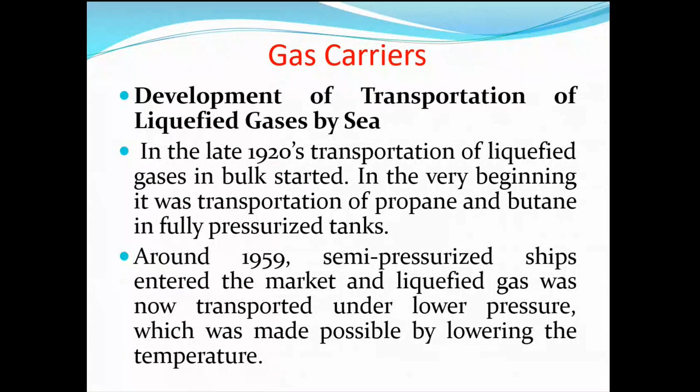If I have to transport gas in a gaseous form, we need much more space compared to when we transport it as a liquid. I think it's about 600 to 650 times less space required when we transport these gases in liquefied form.

By 1963, fully refrigerated ships for LPG, LNG, and certain chemical gases were in service, carrying cargo at atmospheric pressure.

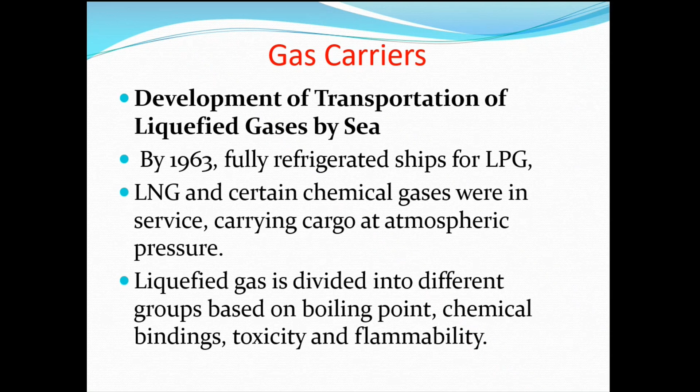Liquefied gas is divided into different groups based on their boiling point, chemical bindings, toxicity, and flammability. These different groups of gases have led to different types of gas carriers, and to different cargo containment systems for gas carriers.

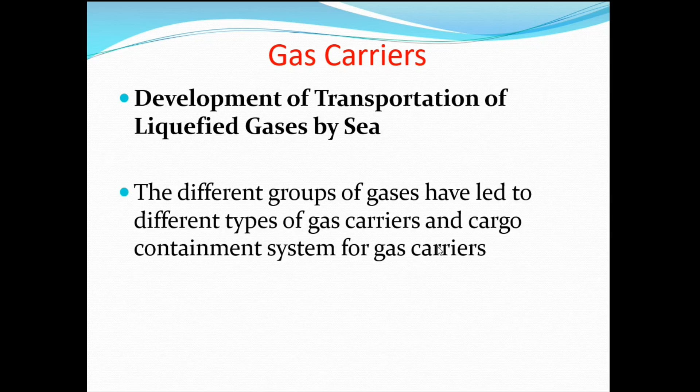This bulk transportation of gases is controlled and regulated by our gas carrier code, the IGC. A lot of research has gone into what type of materials to use for the tanks, especially when carrying at high pressure.

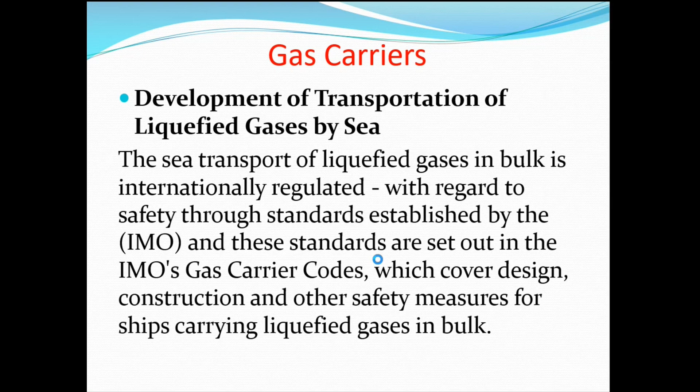Then, of course, the wall thickness of the tanks has to be thick. If you are carrying at very low temperatures, the material should be such that it can withstand so much temperature, like in the case of LNG, which is transported at minus 160, minus 161 degrees. So definitely these materials must be specialized. This is how the research progressed, and finally today, gas transportation looks not so difficult after all the technology that has been put into it.

For economical marine transport, gas is carried in a liquefied state. As a liquid, the volume to weight ratio at atmospheric pressure is in the range of 650 times less than in the gaseous state. That means we can carry 650 times more cargo in liquid state compared to carriage in gaseous state.

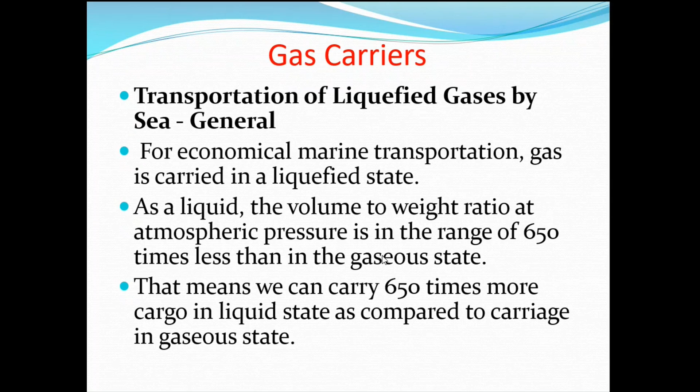The temperature and pressure determine whether gases can be condensed. The temperature at which a gas condenses is a function of its pressure, and the combination of pressure and cooling is therefore fundamental to gas carrier design.

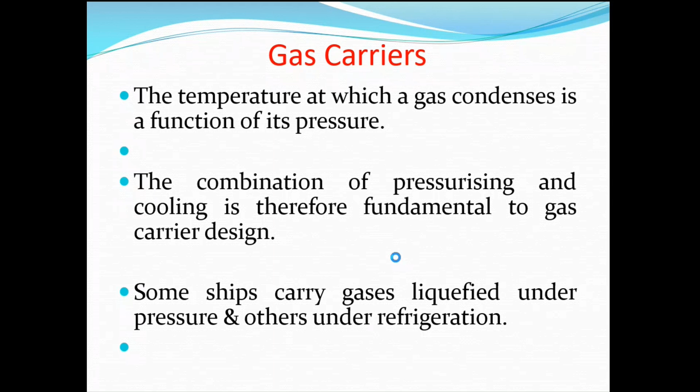Some ships carry gases liquefied under high pressure, while others carry these gases under refrigeration at low temperatures. Certain gases cannot be liquefied even under high pressure, but when you lower the temperature, they can be liquefied. The most significant cargoes in terms of tonnage are methane, what we call LNG, which is mostly methane, LPG, butane, propane, mixtures of these, and ammonia.

Other cargoes of commercial significance include butadiene, ethylene, propylene, and vinyl chloride, which is used for manufacturing PVC. Apart from ethylene and methane, all these gases can exist as liquids at normal ambient temperature, which is the best part, since temperature doesn't affect them, but under high pressure it does.

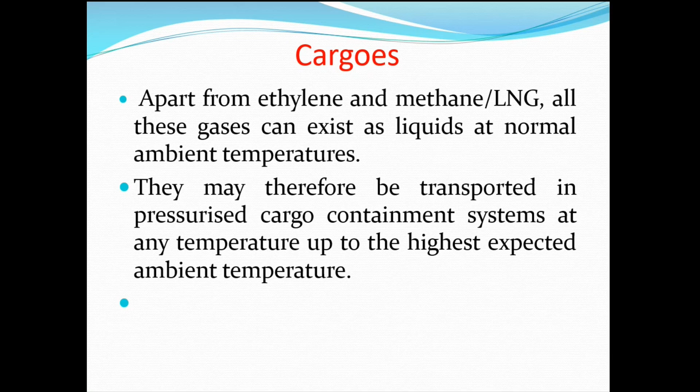Therefore they are transported in highly pressurized cargo containment systems at any temperature up to the highest expected ambient temperature.

The critical temperatures for ethylene and methane, LNG, are below normal. LNG, as I told you, is transported at about minus 160, minus 161 degrees. It is difficult to even imagine carrying a liquid at such a low temperature. You definitely need the ship's design, systems, equipment, gauges, sensors, and pumps that can withstand this low temperature, along with the dangers associated with it.

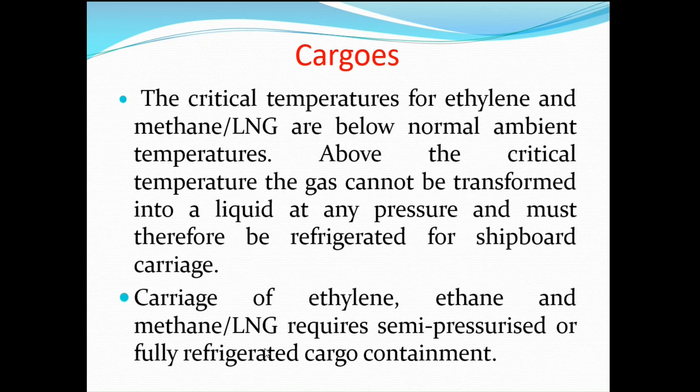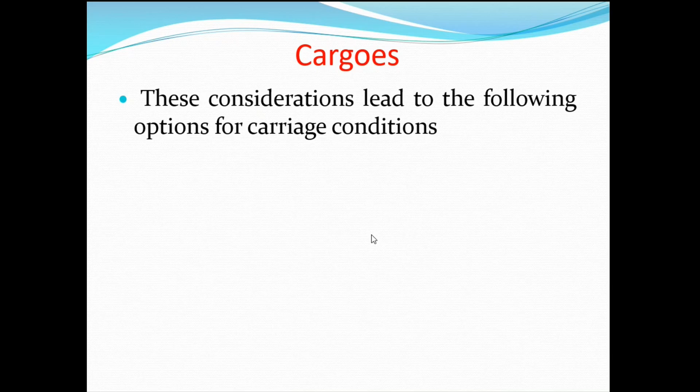The carriage of ethylene, ethane, and methane requires semi-pressurized or fully refrigerated cargo containment systems. These considerations led to the following options: certain gases can be carried in highly pressurized vessels, certain gases in refrigerated vessels, and certain gases in semi-pressurized or fully refrigerated systems.

That's why you see different types of ships, because all these gases cannot be carried in the same ships. Some need fully pressurized, some semi-pressurized, and some need fully refrigerated systems. So this is what we will see next, the various types of gas carriers, based only on these properties of the gases to be carried.

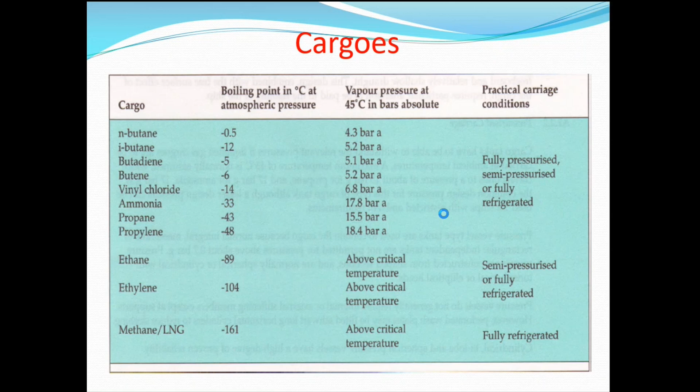Now comes the materials. Materials exposed to liquefied gas cargo should be resistant to any corrosive action of the gases. For this reason, copper alloys and brass have to be excluded from the cargo systems of ships.

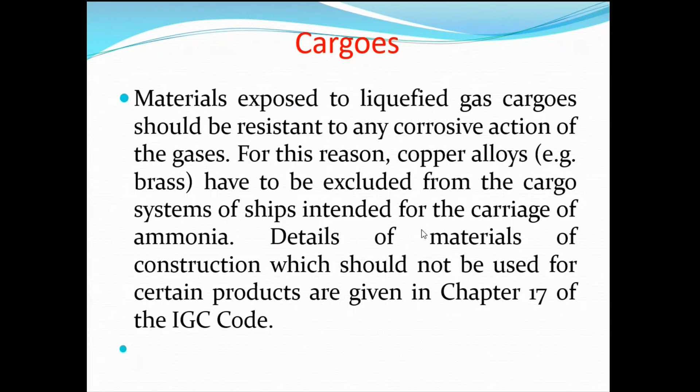And details of these materials of construction which should not be used, again chapter 17 of the IGC code. Now this code is again very nicely written, covering the properties of these materials, how they react and what they can do. So during construction they take care of all this following the IGC code.

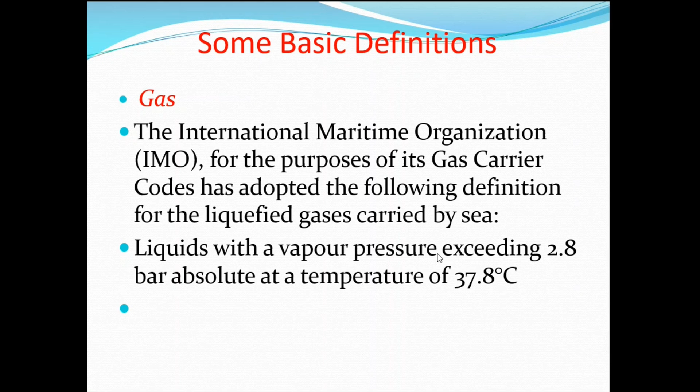Now some basic definitions, of course, for guys who are not working on gas carriers. A gas, as per IMO for the purpose of its gas carrier codes, is a liquid with a vapor pressure exceeding 2.8 bar absolute at a temperature of 37.8 degrees or 100 degrees Fahrenheit. Any liquid which has a vapor pressure exceeding 2.8, they call it a gas.

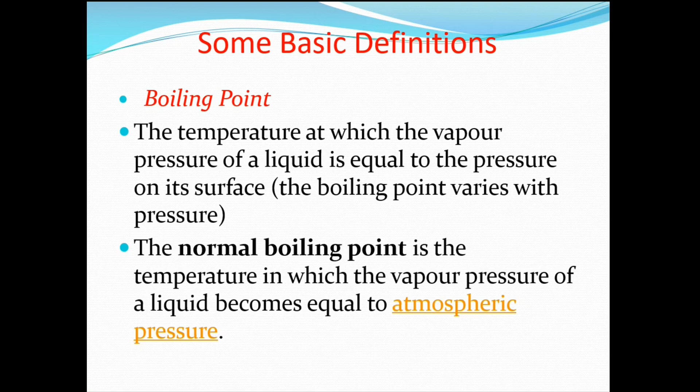Boiling point is the temperature at which the vapor pressure of a liquid is equal to the pressure on its surface. Simple. Or it is the temperature at which the vapor pressure of a liquid becomes equal to atmospheric pressure.

Cargo area, of course, we are all familiar with. Cargo area on any ship, especially tankers, you have seen. Now this cargo area is a dangerous part. Gases, flammability, anything is present there. So it is the part of the ship which contains the cargo containment system, cargo pumps, compressor rooms, and includes the deck area above the cargo containment system. Cargo containment system is basically your tanks.

Cofferdams, ballast tanks, void spaces at the after end of the aftermost hold space or forward end of the forwardmost hold space are excluded from this cargo area. So the cargo area is where all these things are, basically your cargo tanks, pumps, pipes, compressor rooms, and this area definitely will be a hazardous area.

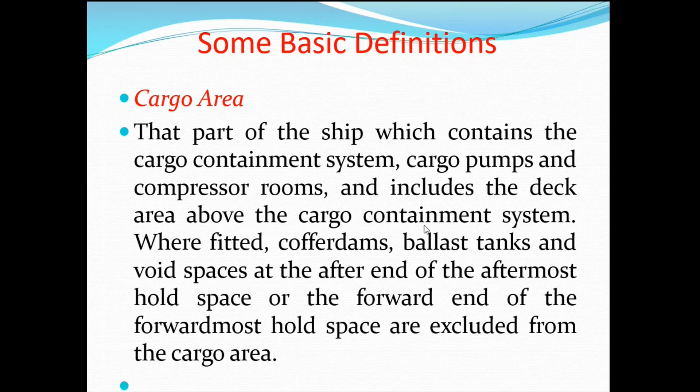Cargo containment system: the arrangement for containment of cargo including, where fitted, primary and secondary barriers, associated insulation, and inter-barrier spaces. So this is what we call the cargo containment. It's like a thermos flask, no? You have a primary barrier, you have a secondary barrier, so the temperature should not affect it, and in between you have insulation.

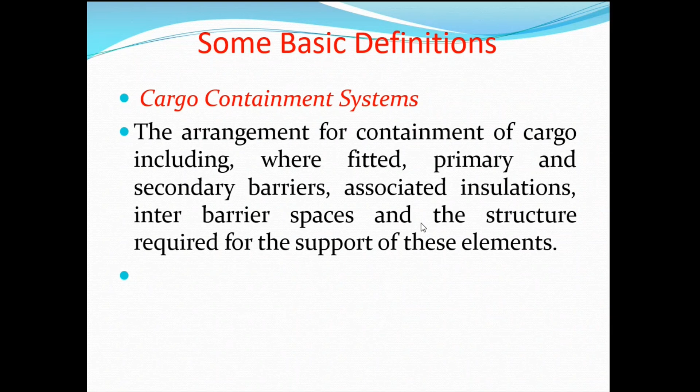Gas dangerous space or zone is a space or zone within a ship's cargo area which is designated as likely to contain flammable vapor and which is not equipped with approved arrangements to ensure the atmosphere is maintained in safe conditions. Any ship we have, whether it's tankers, product, chemical, all these areas where gas vapors are present, we declare them as a gas dangerous zone.

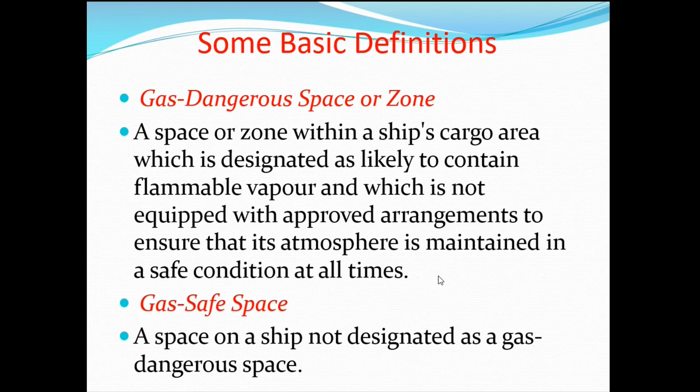And a gas safe space is one which is designated as not a gas dangerous space, like inside your accommodation. Of course we have certain spaces, otherwise smoking and all that is not permitted. So only the non-gas spaces where no gas exists are considered safe.

Hold space, these are the terms very frequently used in gas carrier designs or the gas carrier code. The hold space is the space enclosed by the ship structure in which your cargo tanks are basically kept. It's like a cargo hold, and you keep a structure or a tank inside the cargo hold. So the space between your tank and the ship structure becomes your hold space.

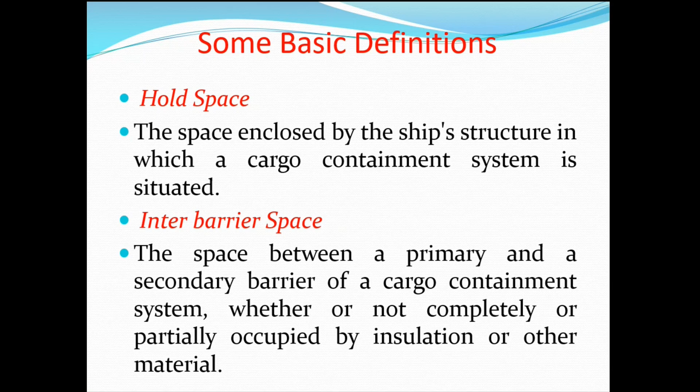Interbarrier space is the space between the primary and secondary barrier. It's very simple if you see it from the sketch also. MARVS, another term, is the abbreviation for maximum allowable relief valve settings. Normally all tanks have individual relief valves in case the pressure exceeds. These valve settings are even mentioned in your COF, that all these valves for these cargoes are set at a particular pressure.

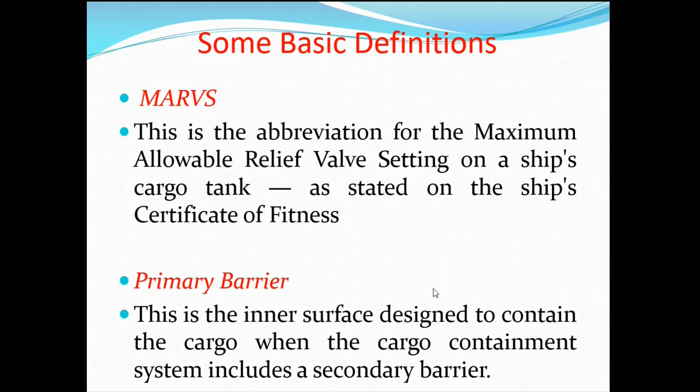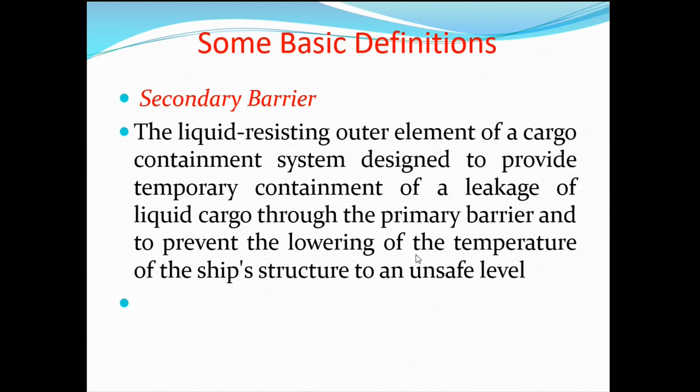Primary barrier is the inner element designed to contain the cargo. And the secondary barrier is basically the liquid resistant outer element of a cargo containment system designed to provide temporary containment of a leakage of liquid cargo through the primary barrier. So the idea is basically to contain the cargo. In case there is a leakage in the primary barrier, it should not go out to sea. So the secondary barrier, which is basically a hull design, hull structure, will stop this cargo.

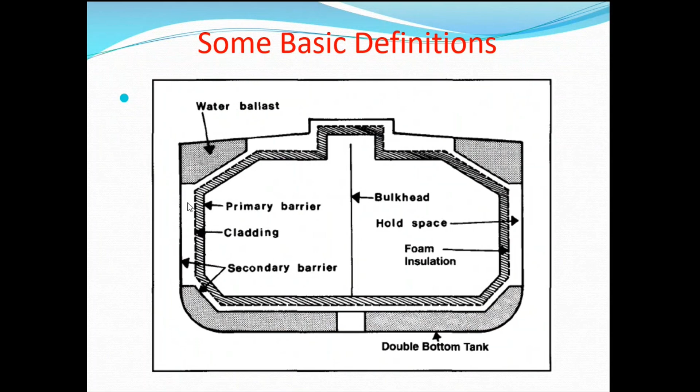So a normal tank, like I told you, first is the inner space where you load the cargo. This becomes the primary barrier, the inner coating. Then you have the insulation, steel cladding, and then the secondary barrier is again the hull. So in case the cargo leaks from here, it will not go out, it will remain in what we call the secondary barrier or the hold space.

Tank dome, a very common tank dome we see. On these gas carriers, it is not permitted for the cargo pump room to be placed below the upper deck, nor may cargo pipelines be run beneath the deck level. So therefore deep well or submersible pumps must be used for cargo discharge. Pipelines to cargo tanks must be taken through a cargo tank dome which penetrates the deck.

So these tank domes are basically used for all your pipelines, everything which is running. So there is nothing under deck like what we have on a liquid carrier or a cargo oil carrier, where the pipeline and pump room are all down below. Here everything runs through this tank dome.

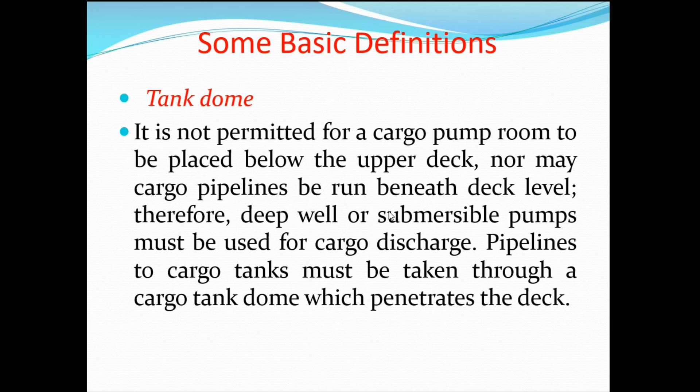Now comes the hazards. So what are the basic hazards which are associated?

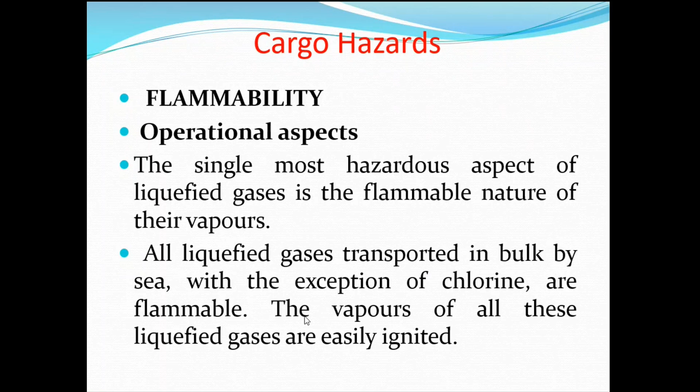Now flammability: the single most hazardous aspect of liquefied gas is the flammable nature. All liquefied gases transported in bulk by sea, with the exception of chlorine, are flammable. Vapors of all these liquefied gases are very easily ignited, because the moment the pressure is reduced or the temperature goes up, the liquid gets converted into vapor, and vapor mixing with oxygen, simple, catches fire. The exception is ammonia, which needs a higher ignition energy, and accordingly fires following ammonia leakage are less likely than with other cargoes.

Now, emergency aspects. Even on the ship, even on the terminals, we all know these gases are highly flammable, so the areas are declared ignition free zones. Why? Because of the very rapid vaporization of spilled liquid gas. Now it is in a liquid form. The moment it comes outside, the pressure is reduced. If it is carried at low temperature, the temperature goes up and it gets converted into vapors. And the spread of this flammable vapor will be far more extensive than in a similar spillage of oil.

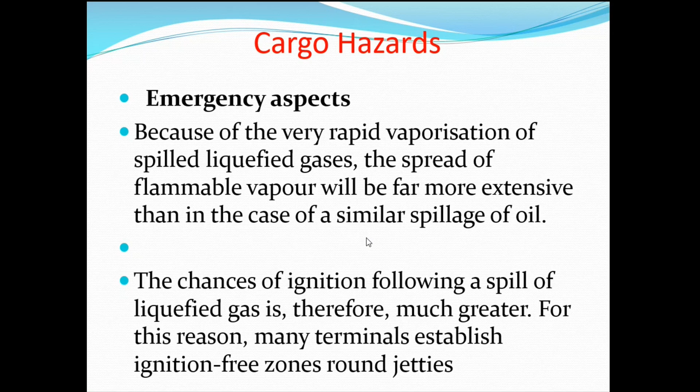So chances of ignition following a spill of liquefied gas are much greater. For this reason, at terminals, ships, everywhere, we take extra precaution: no ignition, no sparks, no flames, no smoking at all. And radiation from these liquefied gas fires, because of the rapidity of vapor production, can be intense. We cannot do firefighting like a normal case in normal clothing. You have to wear protective clothing because fire extends very fast, and the radiation from this fire can be intense.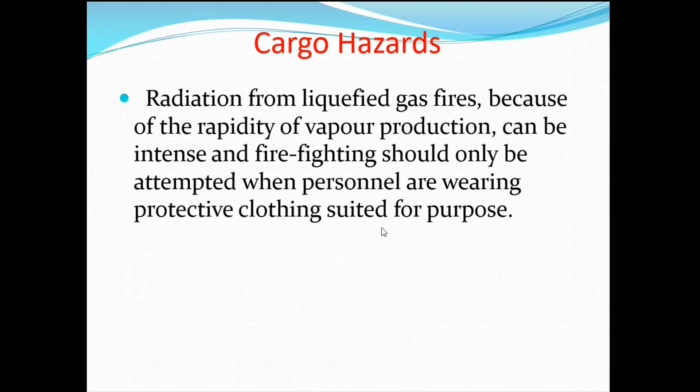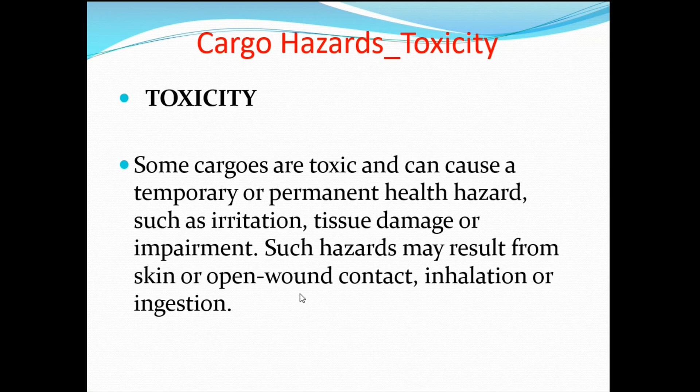Toxicity. Of course, some cargoes are toxic and cause temporary or permanent health hazards, such as irritation, tissue damage, impairment. We have seen toxicity in chemical tankers also; toxicity is everywhere today, even in crude. Some crudes have toxic effects and can enter through your skin, or open wound contact, inhalation, ingestion. We have gone through how toxicity affects us, so here also the same danger exists.

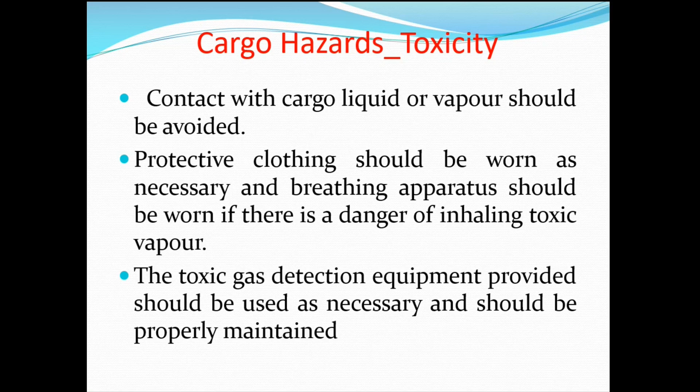Contact with cargo liquid and vapor should be avoided. Protective clothing, and if required, breathing apparatus and toxic gas detection equipment should be used as necessary and properly maintained. Now next is asphyxia, which is basically suffocation.

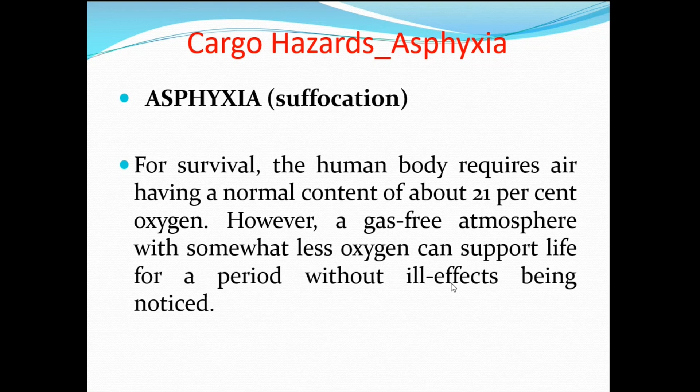Now when these gases or vapors are present in excess, there will definitely be a reduction in oxygen. And we know that the human body requires 21% oxygen for survival. However, in a gas-free atmosphere, somewhat less oxygen can support life for a period without ill effects being noticed. But the susceptibility of persons to reduced oxygen levels varies from person to person, and at levels below 19%, you find the person behaving absolutely differently.

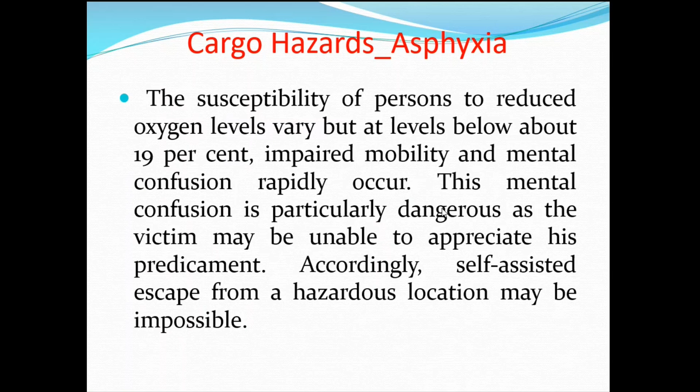There's mental confusion when the oxygen level is, say, about 19%. He may not be able to appreciate the predicament, or what is happening around him. So we may think that he is okay, but in reality he is suffering from the lack of oxygen. And below 16%, chances of survival are less. Unconsciousness takes place rapidly, and if the victim is not removed, permanent brain damage.

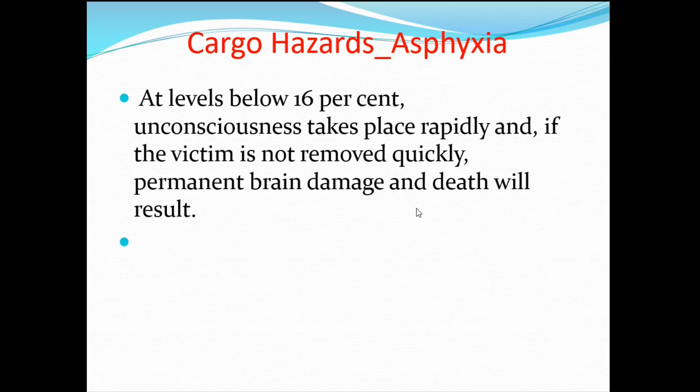So these are the very basics. We have all studied in the medicare courses how the oxygen effect works. Here also, if more of these cargo vapors are present, there will be less oxygen. Now in general, such a problem is limited to enclosed spaces. Oxygen deficiency in an enclosed space can occur due to any of the following reasons: when large quantities of cargo vapor are present, large quantities of inert gas or nitrogen are present, or rusting of internal tank surfaces has taken place.

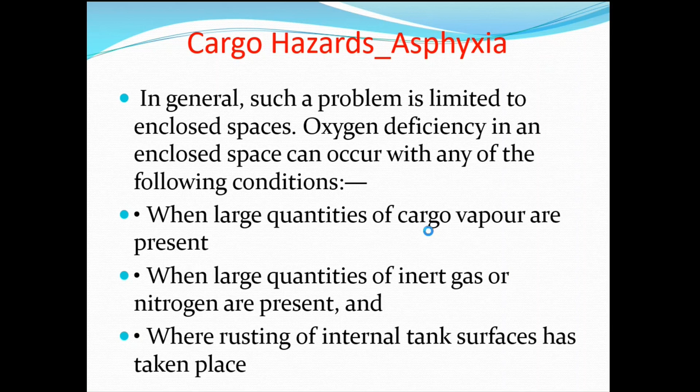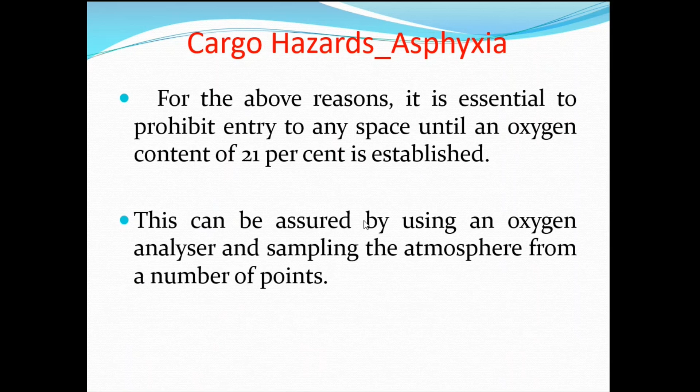So when you know of the presence of cargo vapors or an inert atmosphere, it is understood that there will be a deficiency of oxygen. So for the above reasons, it is essential to prohibit entry to any space until an oxygen content of 21% is established. And of course, we know how to check the O2 content.

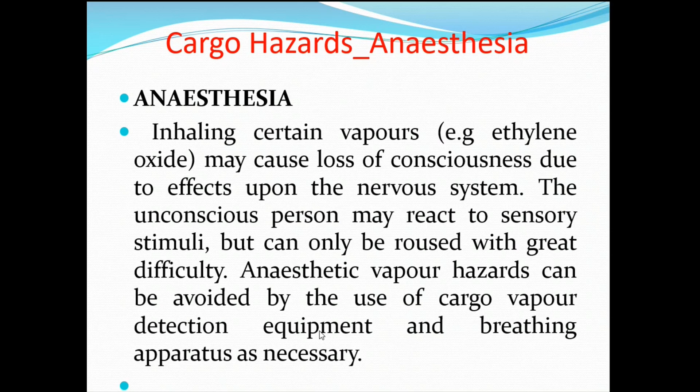Anesthesia. Now these gases have an anesthetic effect also. Inhaling certain vapors, for example ethylene oxide, may cause loss of consciousness due to the effect upon the nervous system. Sometime in life the doctors inject an anesthetic, either local or general anesthesia, and your nervous system doesn't feel anything. The unconscious person may react, but can only be roused with great difficulty. So anesthetic vapor hazards can be avoided by use of cargo vapor detection equipment and breathing apparatus, in case you have to work in that area.

Frostbite. Another danger with these liquefied gases carried at low temperature is that the extreme coldness of some of these gases itself is a significant hazard. Sometimes you may have seen engineers suffer when they touch the freon pipes in the refrigeration system. Those pipes are at such a low temperature that frostbite is something like a burn. If the skin is exposed to severe cold, the tissues become frozen. This danger is ever present in gas terminals and on ships handling fully refrigerated cargoes.

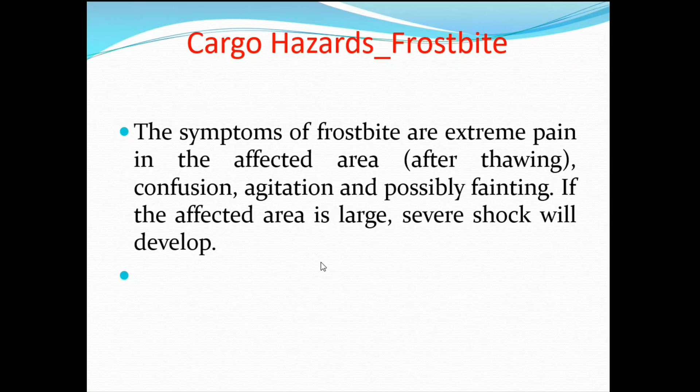Symptoms of frostbite: extreme pain in the affected area, confusion, agitation, and possibly fainting. Shock if the affected area is large. On normal ships we don't experience this. The only chances are when you touch refrigeration or air conditioning where these low temperatures exist. The skin initially becomes red, but then it turns white. The affected area is usually painless and hard to touch.

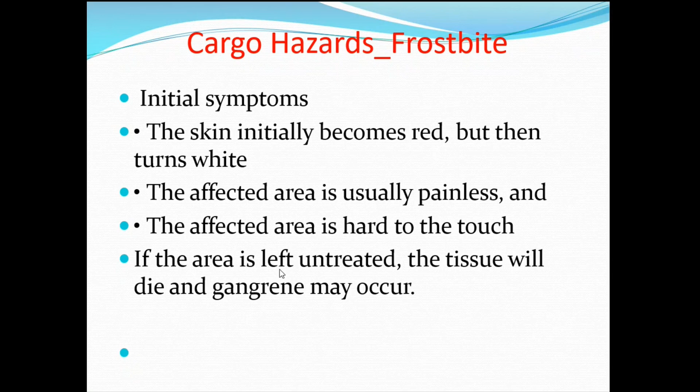And if it is left untreated, the tissues will die, and there's something called gangrene. If gangrene sets in, it spreads very fast, the tissues start dying, so that particular portion of your body has to be amputated to save the life. So frostbite is not a simple thing. It's not like just a burn where we apply something and the part of the body will recover. Gangrene is very common at extreme high altitudes, even for army people serving at Siachen. In extreme cold, frostbite is very common in winters.

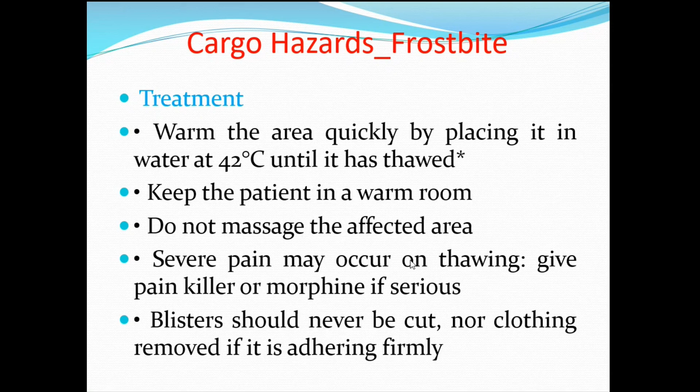So treatment is: warm the area quickly by placing it in warm water at 42 degrees until it comes to normal temperature. Keep the patient in a warm room. Do not massage the affected area; we have a tendency to massage a cold burn. No. Severe pain may occur on thawing, so give a painkiller, or morphine if serious. Blisters should never be cut, or clothing removed if adhering firmly. Dress the area with sterile gauze, and if the area doesn't regain normal color and sensation, get immediate medical advice, because if it remains white, the cells are dying.

So these are the hazards and the immediate actions we are supposed to take. We know the hazards, and along with that, the rectification, because sometimes they ask you what the hazards are and what measures you can take. Immediate action is necessary without warm water close at hand: in the first instance, the affected part can be warmed with body heat or woolen material.

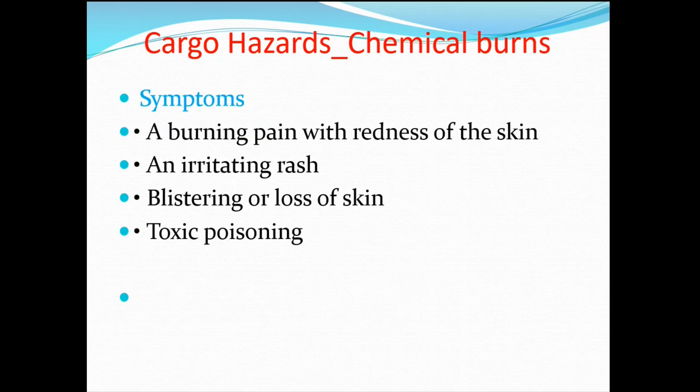Burning pain, redness of skin, irritating rash, blistering or loss of skin, toxic poisoning. So ये सारे symptoms आपके with the chemical burns के साथ. अब इसका भी treatment: attend first to the eyes and skin. Wash eyes thoroughly for 10 minutes with copious amount of fresh water. Skin: wash the skin thoroughly for 10 minutes and cover with sterile dressing.

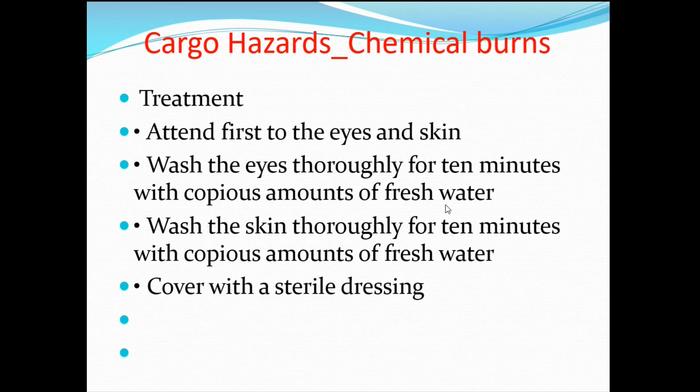अब इस चीज के लिए है कि yes, when you are carrying these gases, immediately we cannot rush. So therefore, most of these gas carriers have deck showers and eye baths on deck at a very convenient place, so that if something happens, immediately. So water is the best solution. Copious amount of water you use for your eyes, anything, उसका effect को nullify करने के लिए.

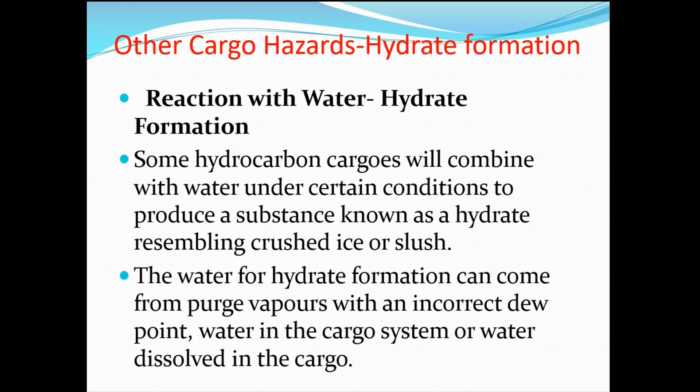So normally this care is taken before the cargo is processed or supplied, that there is no water in the cargo. Other liquids we have seen, tankers we can accept, so if water comes into the cargo, it will separate and settle down. But here it is not going to settle down, it is going to even get converted into a very hard ice. Hydrates can cause pumps to seize, equipment to malfunction. Care should therefore be taken to ensure there is no hydrate formation.

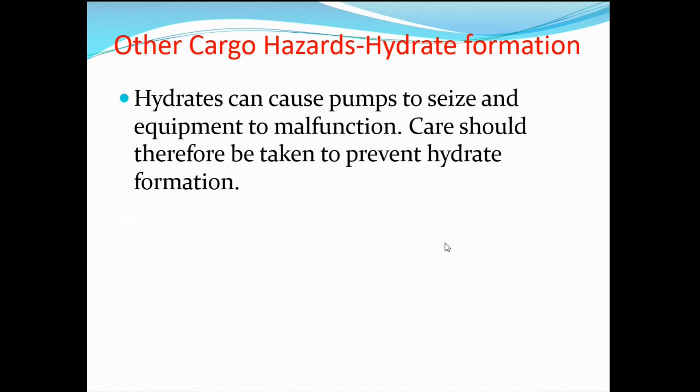Certain cargoes, like notably LPGs, may contain traces of water when loaded. Now, it may be permissible in such cases to prevent hydrate formation by adding small quantities of antifreeze. But again, we don't normally do it. Now they say yes, it is possible, but it is done by the terminal. They will do it because nothing whatsoever should be added to any cargo without shipper's permission.

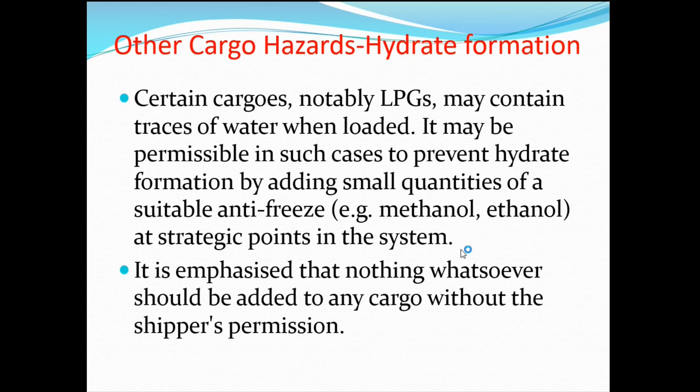So he cannot, otherwise his cargo may go bad. What he has loaded, he may not get. So the possibility is there to save this. Yes, if the cargo contains some traces of water, then they should rectify it. They should put antifreeze and supply so that we don't face any problem with our equipment.

Self reaction, as we studied in chemicals, certain cargo, certain liquefied gases, they may react with themselves. And most common of self reaction is again polymerization, which may be initiated by the presence of small quantities of.

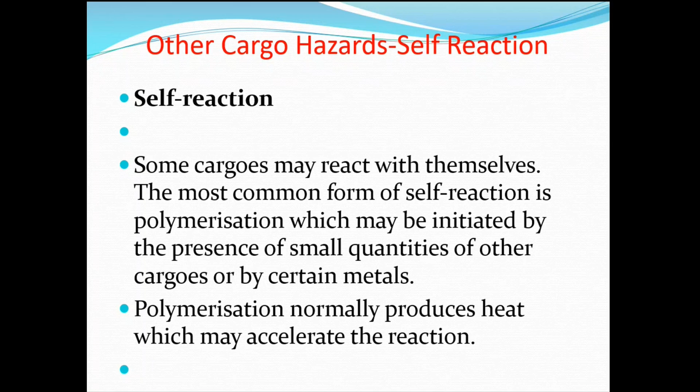So again the IMO code requires cargoes which may self-react either to be carried under inert gas blanket or to be inhibited. We have seen that yes, the shipper has to basically see this - if this type of reaction is possible, they should add inhibitor so that this reaction doesn't take place and the cargo can be safely carried.

And in the later case, if it is added, a certificate must be given to the ship stating the quantity, name of the inhibitor added, the date it was added, and how long it is expected to remain effective. So of course all these things are well planned.

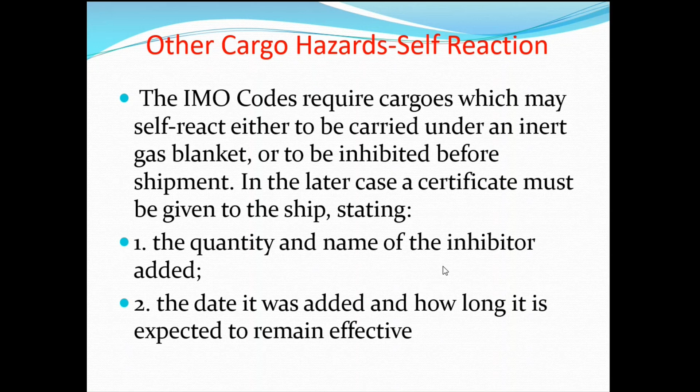How long is the ship's voyage, if there is a possibility of any delay - a ship is a ship, sometimes berthing delay happens, meaning the inhibitor's life will end - the shelf life is only for so many days, after that there are chances of reaction taking place. So this is well taken care of.

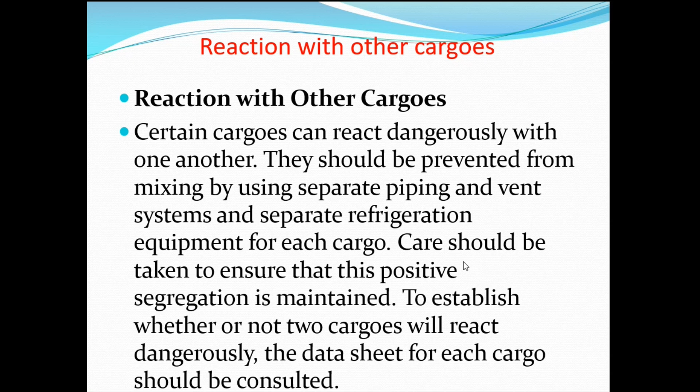Now the data sheet lists materials which should not be allowed to come in contact with the cargo. Materials like our tank material, pumps, gaskets - lot of things are inside when we use this. So material used in cargo systems must be compatible with the cargoes to be carried, and care should be taken to ensure no incompatible materials are used or introduced during maintenance.

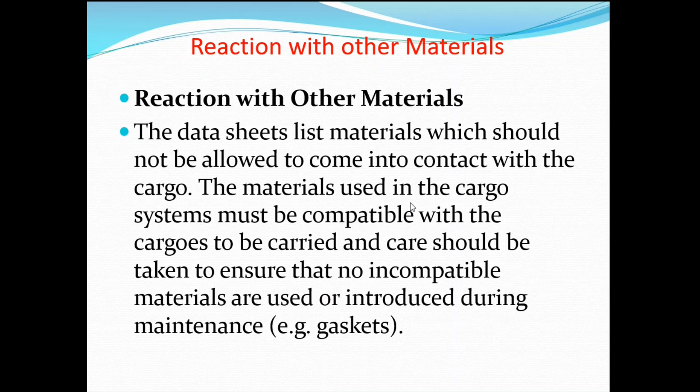Reaction can occur between cargo and purge vapors of poor quality. For instance, inert gas with high CO2 content can cause carbonate formation with ammonia. The reaction can also occur between compressor lubricating oils and some cargoes, resulting in blockage and damage. This is also dangerous, so knowledge of this is also needed.

So sometimes if you have to do inerting, if there's a reaction with CO2, the other solution is pure nitrogen. Some ships have nitrogen generators, so nitrogen can be used as an inert gas.

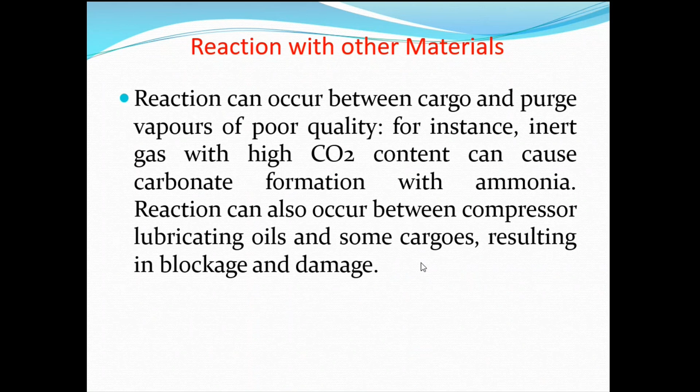Corrosivity is present with all - whether it is chemical or gases or vapors, anything - it can be corrosive. So code requires material used in cargo system to be resistant to corrosion by cargo, and care should be taken to ensure unsuitable materials are not introduced in the cargo system.

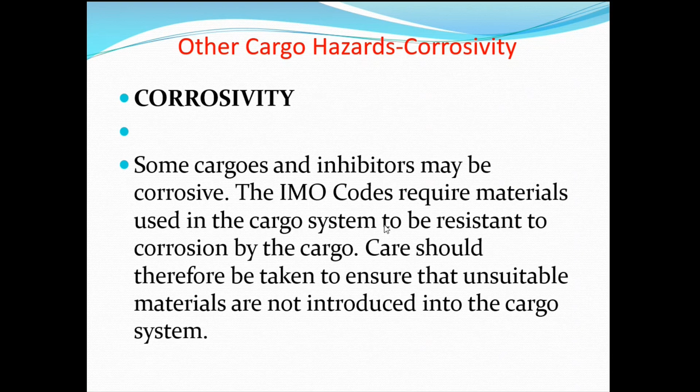Here, corrosiveness has its dangers. Corrosive liquids can attack human tissue - both materials and the human body are at risk. So we cannot afford leakage of any kind, whether it's a liquefied gas whose vapors can also be corrosive. So touching or coming in contact should be avoided.

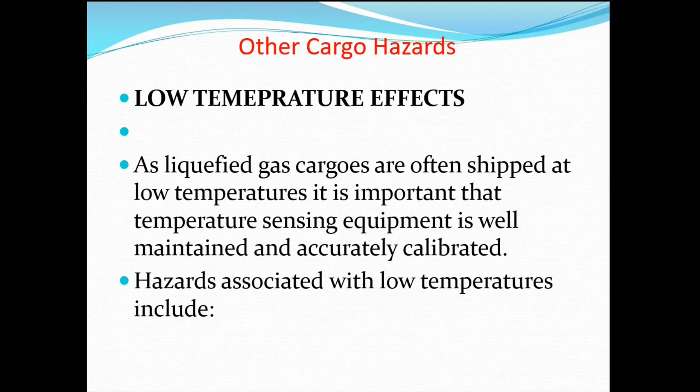Hazards associated with low temperatures are basically brittle fracture. What is brittle fracture? It's about metals. If the same liquid at very low temperature, say -100, any liquid is sprayed on deck which is made of mild steel, that structure can crack because of what we call brittle fracture.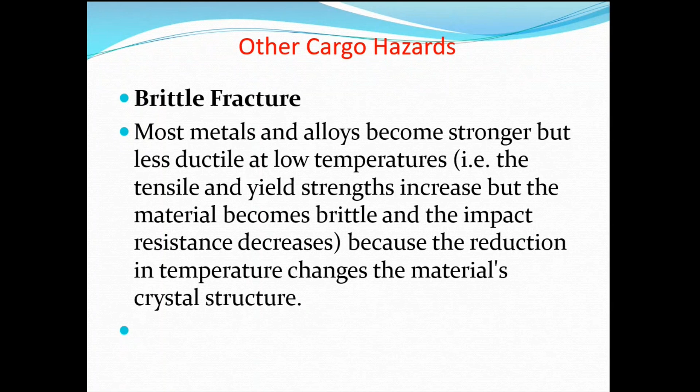We also go to these cold climates, Russia, East Canada and all, very common, -30 degree is very common. So the ships are designed in such a way that the plating can stand these cold temperatures.

So for this reason, care should be taken to prevent cold cargo from coming in contact with such steels, as the resultant rapid cooling would make the metal brittle and would cause stress due to contraction. So in this condition, the metal would be liable to crack. This phenomena occurs suddenly, what we call the brittle fracture.

So this is also an issue with this cargo. But anyway, the ships are designed, we can't do much about it. While designing, they decide what metals are used, even in the tanks.

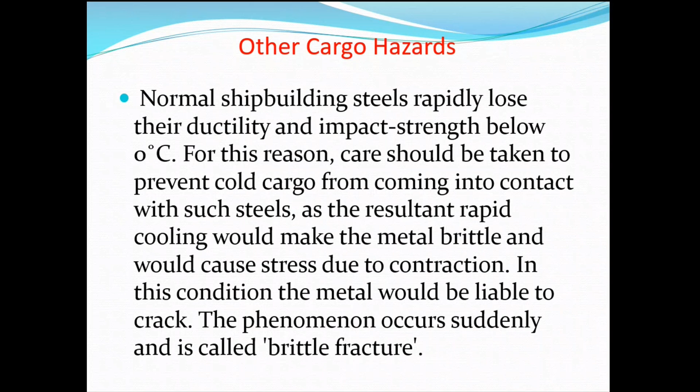If you look at the LNG tanks, the metal used inside is Invar, basically a nickel and steel alloy, so that can stand very low temperatures. So this is basically the whole technology.

However, ductility and impact resistance of materials such as aluminium, austenitic and special alloy steels and nickel improve at low temperatures, and these metals are used. Yeah, nickel alloys have a quality that they can stand very low temperatures, nickel and steel. These metals are used where direct contact with the cargoes at temperatures below -55 is involved.

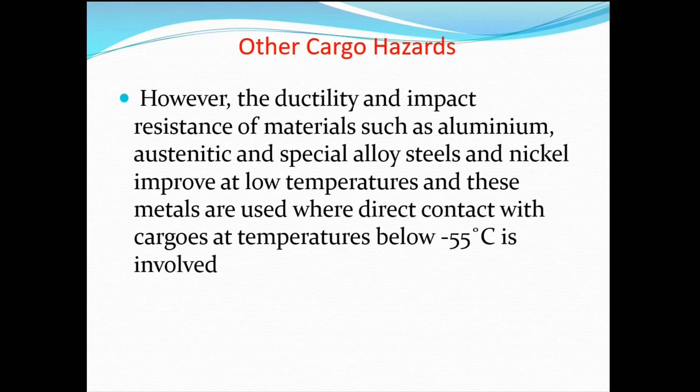Spillage is dangerous as well. To prevent spillage at low temperature cargo because of the hazard to personnel and danger of brittle fracture - as I told you, if it comes on deck, there are chances because of the low temperature anything can happen to the steel deck.

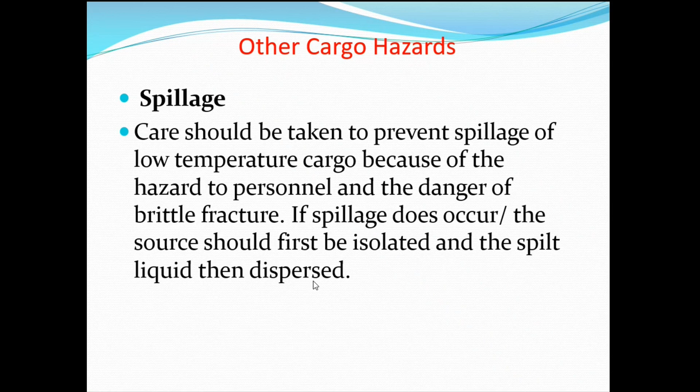So spillage does occur, source should be first isolated, spilled liquid then dispersed. Otherwise it will immediately vaporize.

Now cool down - cargo systems are designed to withstand a certain service temperature. If this is below ambient temperature, the system has to be cooled down to the temperature of the cargo before cargo transfer. We'll also see how these tanks are cooled down before loading.

For LNG, ethylene, this is about thermal stress. LNG is at -160 and you cannot lower this temperature suddenly. It's not that your tanks are at ambient temperature and we need to bring them to -100, it will not take 1 or 2 hours.

So there is again a specification, a condition for at what rate the temperature has to be lowered, maybe about 10 degrees an hour. So if I need to bring it to -100, about 10 hours the ship will just be cooling down the tanks. For LNG, ethylene, the thermal shock caused by over rapid cool down of the system could again cause brittle fracture.

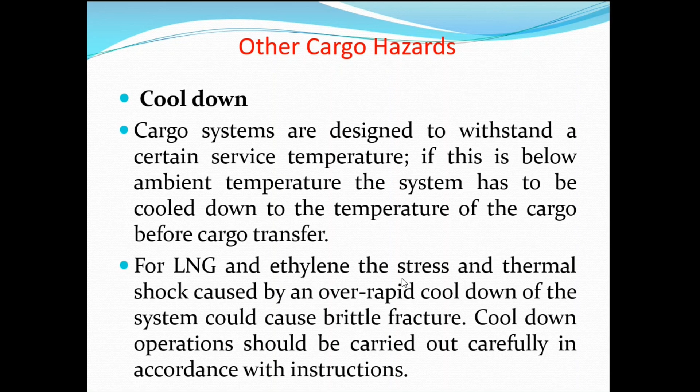Ice formation, that is also possible. Low cargo temperatures can freeze water in the system, leading to blockage, what we have seen as hydrate formation.

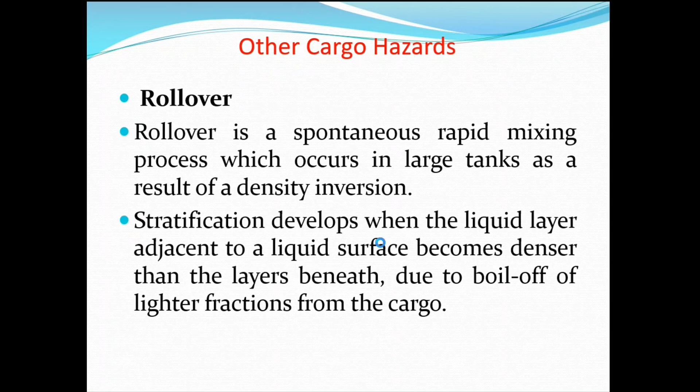So stratification develops when the liquid layer adjacent to a liquid surface becomes denser than the layers beneath due to boil off. Boil off is the same thing, vaporization of the lighter fractions from the cargo. Now this obviously becomes an unstable condition, and ये जो unstable condition है, it has to relieve itself with a sudden mixing. अब ये low density और high density दोनों जो cargo immediately adjacent to each other, they cannot stay like this, so they will suddenly mix. एंड इनकी जो सडन मिक्सिंग है, दिस इज व्हाट वी नोन एज द रोल ओवर.

And the liquid hydrocarbons are most prone to this rollover, especially cryogenic. Cryogenic means the refrigerated liquids. LNG, most likely by virtue of impurities. So जो इसके अंदर impurities हैं, they may start boiling off, vaporization quickly. थोड़ी सी भी उसका temperature change हुआ, they start immediately boil off शुरू हो जाते. And the extreme conditions of temperature under which it is stored. एक्सट्रीम कंडीशंस क्या, -161. सो बाई चांस थोड़ा सा भी, अब शिप तो शिप है, एक आधा डिग्री टेम्परेचर ऊपर गया तो बॉयल ऑफ विल स्टार्ट.

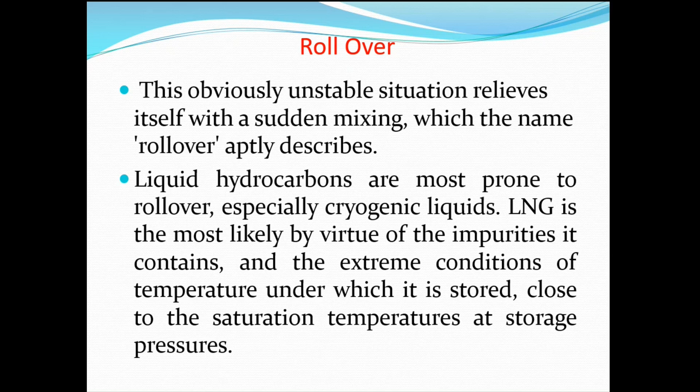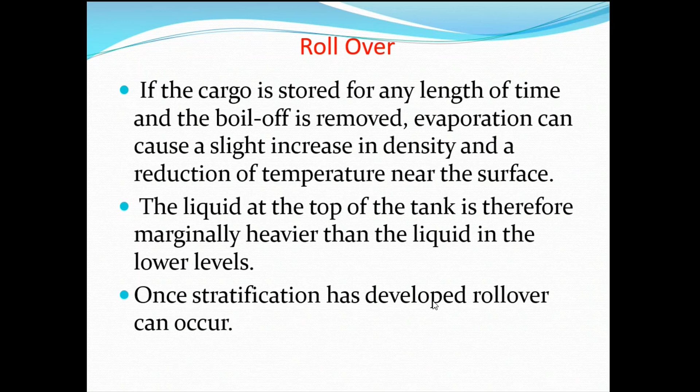So this is basically the phenomena that takes place, and if the cargo is stored for any length of time and the boil off is removed, evaporation can cause a slight increase in density and a reduction of temperature near the surface. So liquid at the top of the tank is therefore marginally heavier than the liquid in the lower levels. And once this layer formation or stratification has developed, rollover can occur. And ये जो inversion है, this will be accompanied by a violent evolution of large quantities of vapor and a very real risk of tank overpressure.

अब ये जो आपके tanks हैं which we are carrying liquid or liquefied gases at a very low temperature, उनकी तो strength भी कम है ना, they are not able to stand high pressure. Because they are built like that, they are built to stand low temperature. Like if we are using the tanks which are for fully pressurized ships, fully pressurized ships के tank strength is quite a lot. The tank plating is quite thick. They can stand 18-20 bars pressure. Whereas these tanks are built of such a material, they cannot stand high pressure. And if this rollover takes place, तो कभी भी rupture हो सकता.

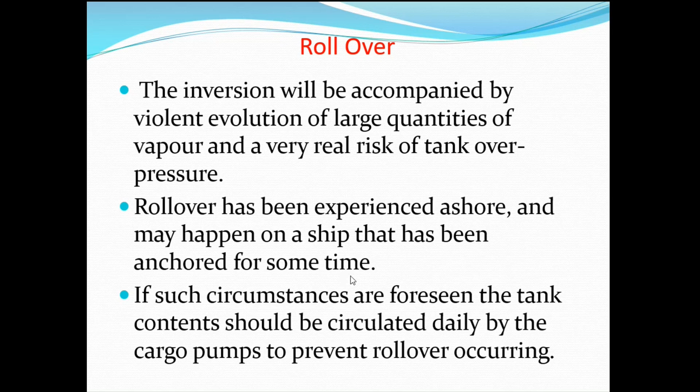So rollover has been experienced even ashore and may happen on a ship that has been anchored for some time. अब ये भी है कि yes, if the cargo is absolutely stationary, anchor पे ship हिल भी नहीं रहा, so there the possibility is there. अब in these cases, the solution is कि इसको कैसे बचाया जाए? Such circumstances are foreseen. The tank content should be circulated ताकि ये layer formation हो ही ना. That's why this recirculation of the cargo by the cargo pumps to prevent rollover occurring. So rollover can also occur if similar or compatible cargoes of different densities are put in the same tank. तो वो भी नहीं होना चाहिए, चाहे cargoes compatible हैं but अलग densities के हैं. So yes, this is what we have to be careful.